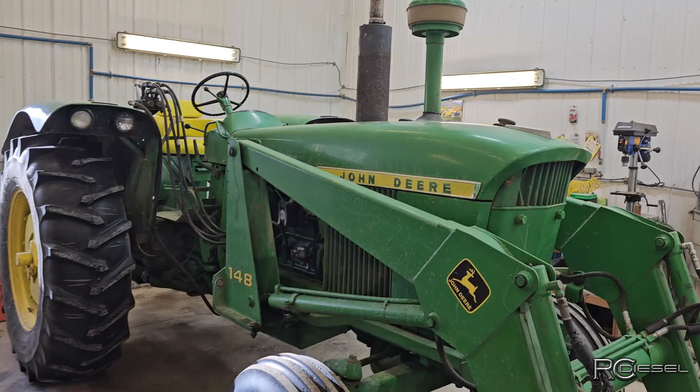Well, there it is. We got the old 4020 down to the shop here. So the story on this one is the customer called and said he had oil leaking down the side of the motor, and I was there one day, just popped in, looked at it real quick, and it's leaking from between the head and the block. That's a real common 4020 thing. So we did some pricing, hummed and hawed. He decided, yep, let's do that head job.

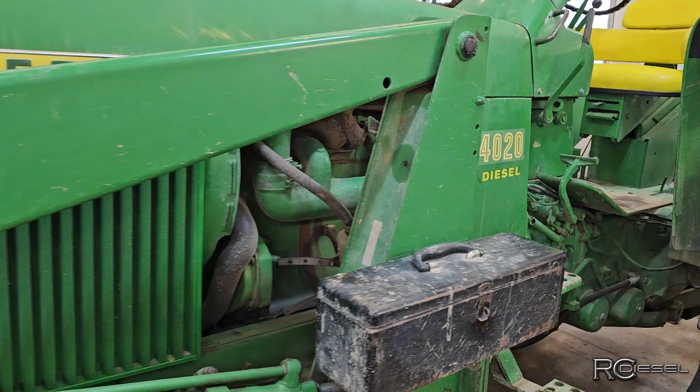And so then when the time came to do that, I was there working on some other stuff, and then I went to pull this tractor in the shop, and I walked up to it and I saw that, and I said, oh, that's bad.

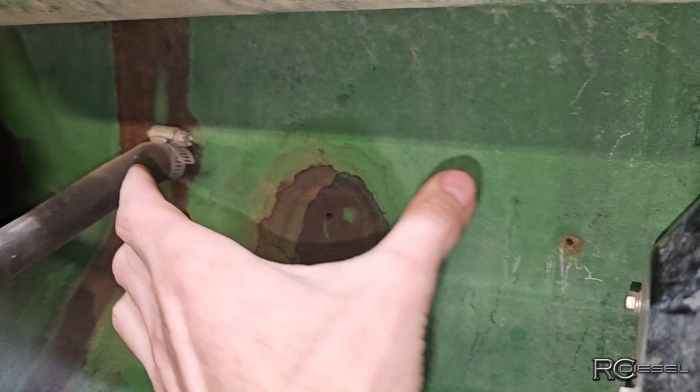So that's a weep hole for your cylinder liners. Your liners sit like this in here, and each one has a weep hole, and there's an O-ring on the top and the bottom. You have coolant up here, and the engine oil obviously goes down to the bottom side. So what that weep hole is for is once your top O-ring gets rotten enough, the coolant starts to fill that cavity in between the two O-rings, and it starts to weep out, which is why it's called a weep hole, and that's your signal that your liners are needing to be resealed.

The nice thing about that is that you get told that before the coolant winds up down in your oil pan. So then we did some more humming and hawing and pricing, and they decided, yeah, if it needs to be rebuilt, we're going to rebuild it. We're going to keep the tractor around for a while.

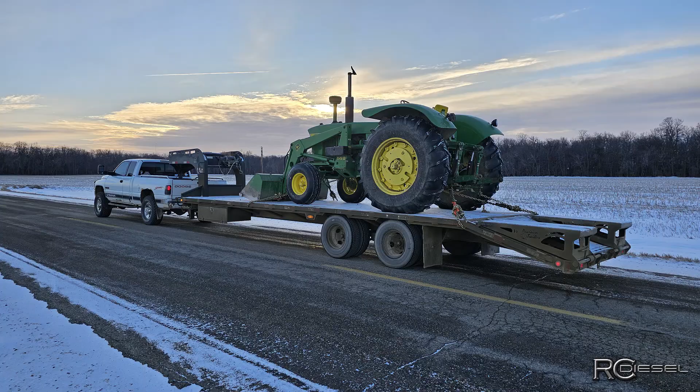Perfect. So then I didn't want to rebuild it at their shop because it's just too many hours. You're always waiting on parts and machining, and so it's too many trips back and forth. It's too expensive. So I just rented a trailer, threw it on the old trusty Rusty, and hauled it down here to my shop for him. And so now we're going to tear this thing down, find out what it really needs, and get her freshened up.

Well, taking that loader off did not go as planned. I didn't have that set up the way I should have. But the loader's off and tractor's in its new spot. We did a little bit of a tractor shuffle here because this one is going to be down for a few weeks. By the time we get a rebuild kit in and head sent away and machining done and all that stuff, we're going to be a couple of weeks for sure.

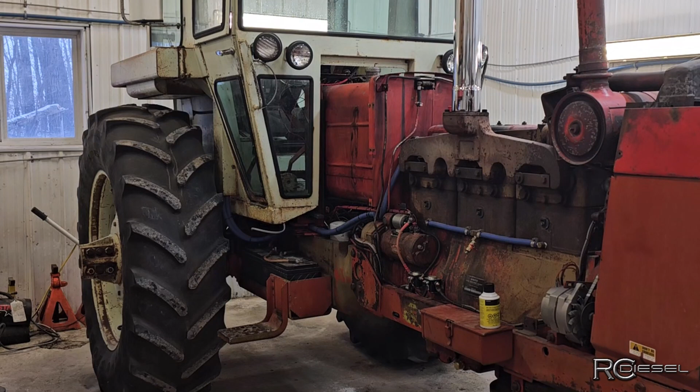So this bay is a lot less accessible to get into the way my shop is set up. That white, I really hope to get that white out of here next week, so it's in a little bit easier bay to maneuver around in. This is my tractor, it's been a huge project. It's been in the shop since, well, it's January now, and it's been in the shop since October, I guess. So just never seem to have time to work on my own stuff.

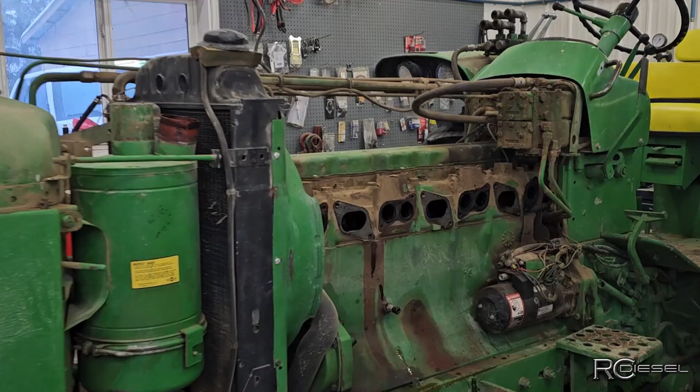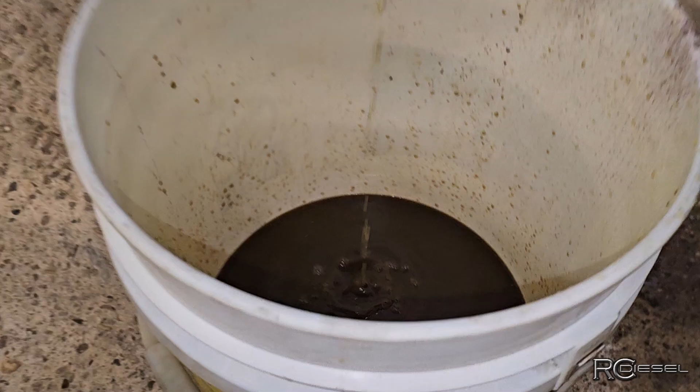Anyway, I gotta get this one apart because we gotta get that head off. So I guess we'll tear into that now. I'm getting a few parts off and on the shelf. The back two bolts on the exhaust manifold were both loose, so that's great. The coolant looks like mud, so that seems fine. Guess we'll keep chugging.

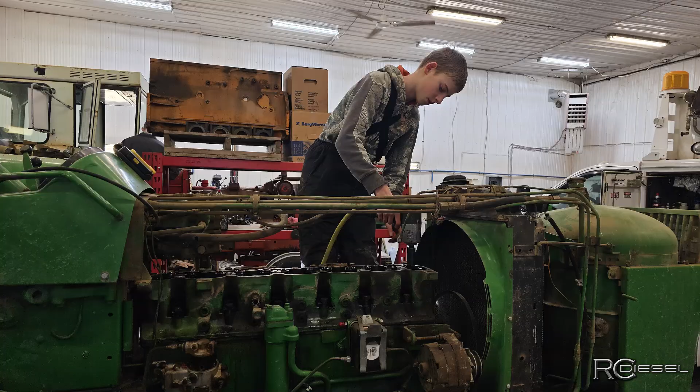Alright, well this weekend I had a couple of my boys at the shop here. One of them was pulling the head and the pan and one piston on that 4020. The other one was wiring up the lights on our old white here.

I wanted to talk about this motor a little bit. The customer who owns this tractor has had it for many, many years. It's been a good tractor, haven't had to do a lot of work to it. Remember, it was leaking oil on the other side there past the head gasket, which is actually a common thing on the 4020s. They do that.

Now this engine, before he bought it, was supposed to have been rebuilt, and he told me the outfit that did it. I've done work for them as well, I know them pretty well. I was pretty surprised to find that these are actually John Deere pistons in here. That's a John Deere part number. That surprised me, because it would be far more typical for them to have put a Reliance kit or an A&I kit in, so I thought that was interesting.

But looking at this head, when we pulled it off, the intake and exhaust ports are all just full of oil, so the guide seals are obviously worn. The intake valves, and the exhaust valves too, look all pretty sunk in. This tractor smoked and blew quite a bit, started okay but had a fair bit of blow-by. Anyway, I know the head has definitely got some time on it, needs to be fixed.

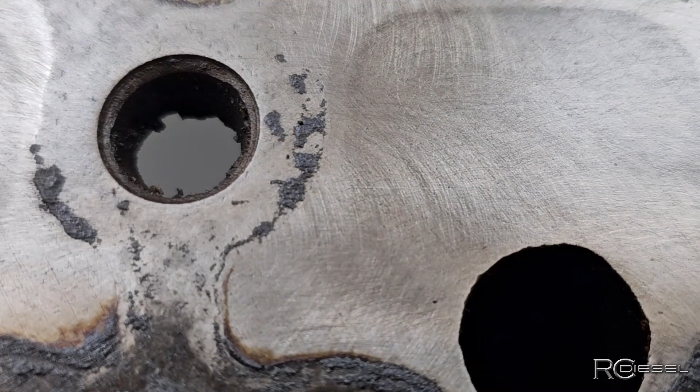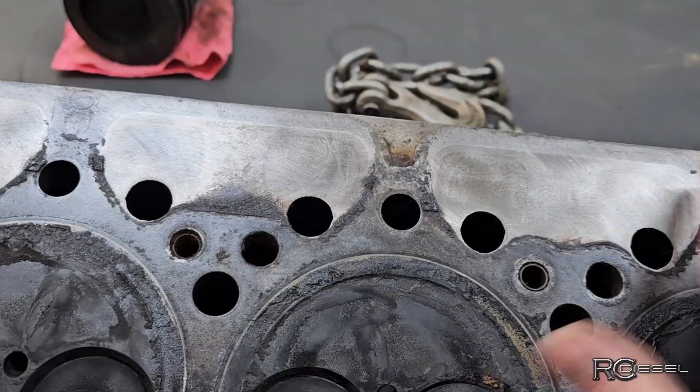But when I look at this, those marks on there would be consistent with a Roloc disc. So I am 99% sure that if this motor was rebuilt, for one, I'm surprised it's got John Deere pistons in it, but this head was not sent in. It wasn't surfaced or anything, otherwise you wouldn't have those marks like that. It would have different machine marks on it. So that's probably why it was leaking oil out of here after it had been rebuilt.

It's many years ago, even though the tractor doesn't have that many hours on it since then, but it's really important to get your head gone through when you take them off. I don't even warranty an engine job if they won't let me send the head in and get it gone through properly. There's just too many things like this that can pop up later, and I know it lasted for many years, but well, let me show you.

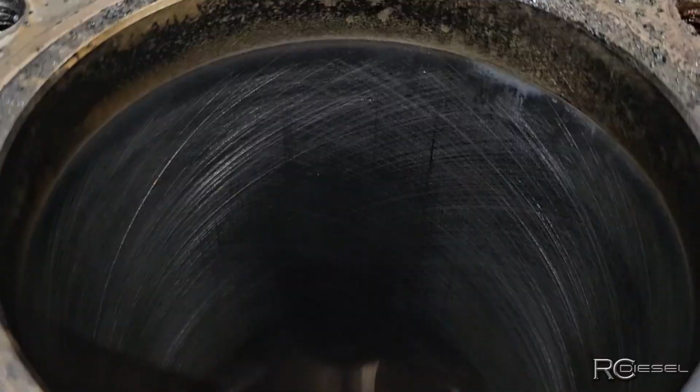Got one piston out, and you can see the crosshatch in there. There's tons of crosshatch. This engine is far from wore out, so we shouldn't be having to pull the head to do a major repair like that already. I would submit to you that if that head had gotten done then, we wouldn't be spending this money now.

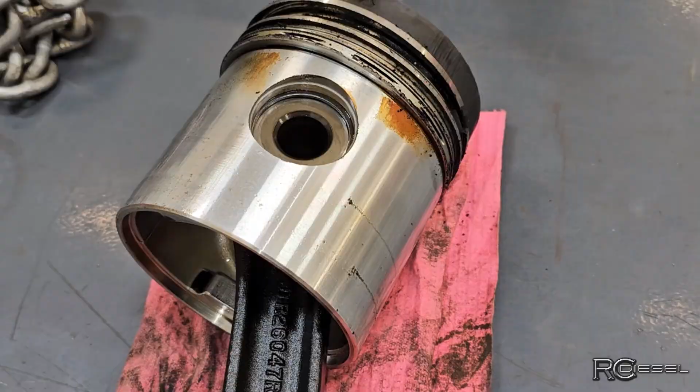I haven't looked real close here yet, but the piston looks great, looks like it's in very nice shape. The rings, I believe, are okay. They don't feel like they're real sharp. They're definitely not wore out.

I think the blow-by was simply a product of the fact that that tractor is more or less a yard tractor and it just kind of putters around, doesn't do a whole lot. Guys, if you have a tractor like this, you got to get that thing hooked up on something where you can work it hard every once in a while and get that engine hot. That's what gets the soot out of your rings. If you don't get that soot out, what winds up happening is they wind up sticking in the ring lands and they don't expand properly and then they don't seal properly.

There's lots of gook in here. These rings are pretty tight, so that's not a good thing, but that's just a product of the tractor not getting used hard enough. And then as far as rebuilding or not rebuilding or whatever, we got this issue that we got to deal with as well. That remains to be seen, we'll see what happens. All I know at this point is what I know, the rest I don't know yet.

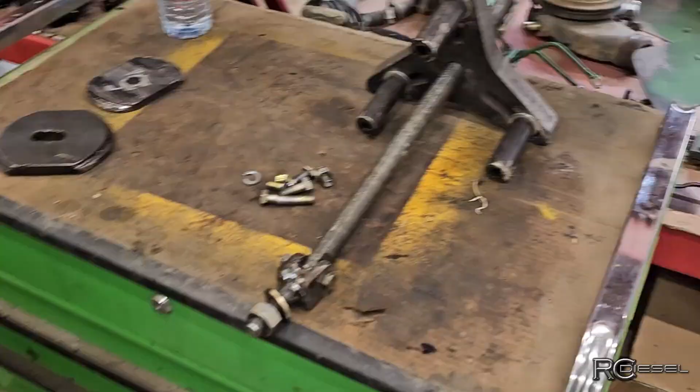Whew, well, we finally got all these sleeves out of here. That was a nightmare, took me all afternoon to get number 2 out. That thing was in there. I was using this puller, I always borrow this from a mechanic friend of mine.

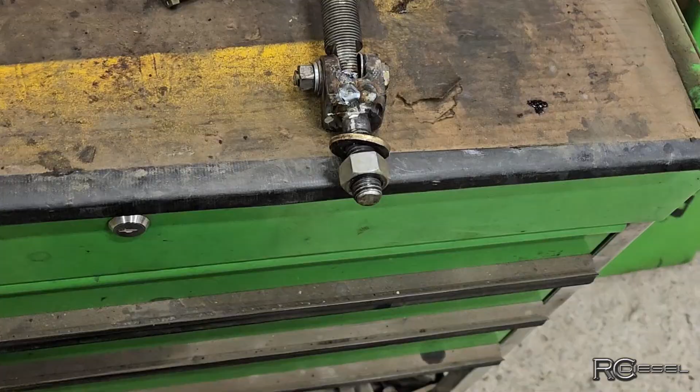We use these plates on there. They fit into the bottom of the sleeve and catch, and then you just pull them out with that. But I kept on breaking the pivot bolts here. And then I remade the end of this because the bolt holes were oblong, so it was bending the bolts and they were breaking. So I remade that all, and the bolt wasn't breaking anymore.

Then I ripped off the ears, so I welded the ears all together more. And then I started bending the plates in half. Man, just craziness. Anywho, we got that all out of there.

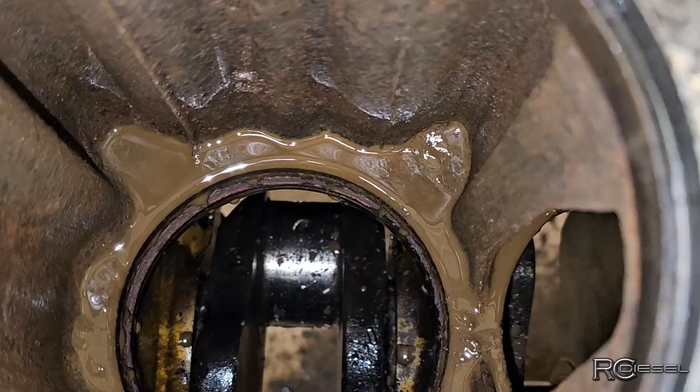Look at the mess inside this thing. Look at the sludge in there. That's the coolant. This thing is a giant mess. I got a pile of work to do.

Oh man, cleaning. Do you see that pipe there? The reason why that pipe is there is because in order to get those sleeves out, I had to jack up on the bottom of the plate. Well, I was using this one. I had to jack up on the bottom of the plate while pulling it with the puller. Otherwise it just kept on breaking stuff.

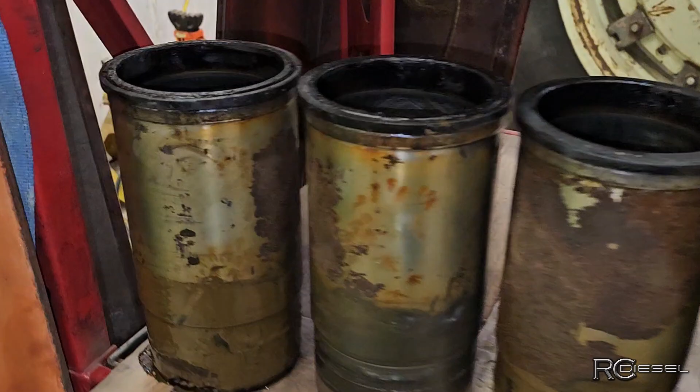Those things were in there so hard. And number 6 sleeve is broken, and that is not a fresh break. It's all black and rusty, so that's been busted for a long time. Actually, on the camera it kind of looks like it is a fresh break, but if I turn the light off there, now you can see it's black.

These cylinders are pretty rusty and pitted. Pretty bad one right there. So I'm going to clean these all up and see what they look like after that. But at this point, I'm not convinced that this tractor got the rebuilt engine that it was supposed to have had.

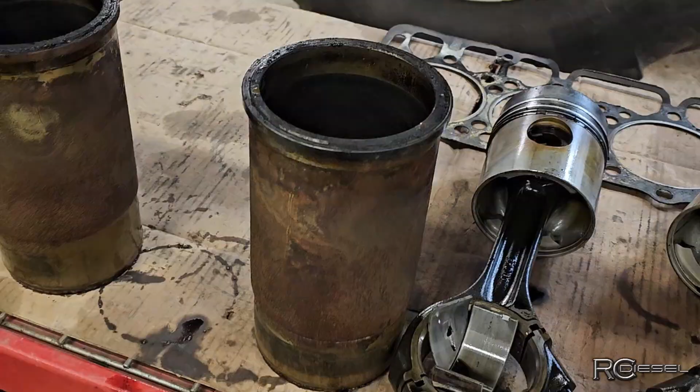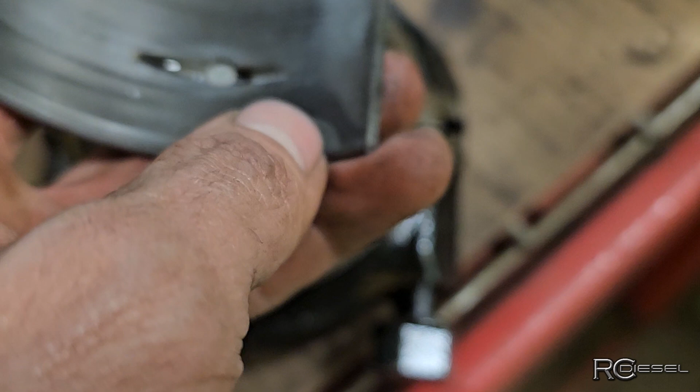The bearings are all pretty, it's hard to tell again on the camera, but they're all pretty scraped up. I had some clean ones here. That one's not too bad, but you can see some wear spots like this all over the place. They're definitely in need of replacement. That one's pretty bad.

So I guess I'm gonna hit this block with some solvent, try and clean it up, make a big mess everywhere. Then I get the top kind of cleaned up and dried off a little bit, and get down into the bottom here and get all that scummy junk out so I can start getting an idea of what I gotta do to clean this up here. It's a lot easier to clean when it's dry anyway.

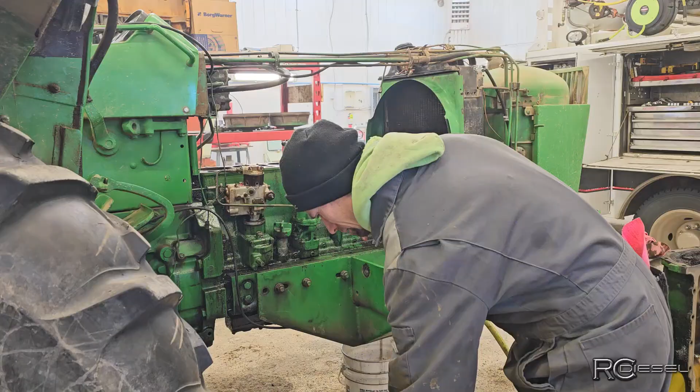Whoa, 4020 parts showed up. Got the Reliance Hyper-Formance kit. That's a good piston. These are good kits, I've put a few of them in. These tractors run really good with a higher compression piston, so looking forward to that.

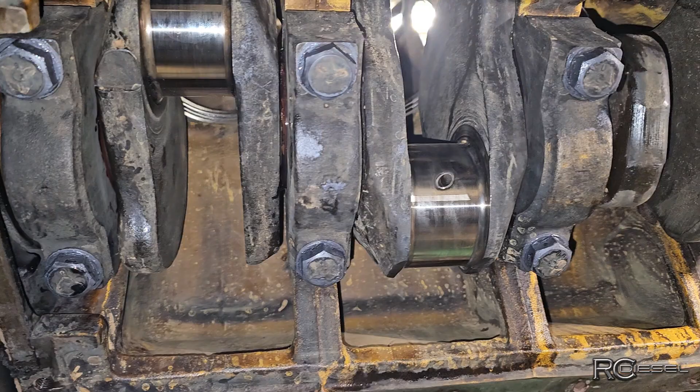There, I just finished the bearing roll in this 4020. I think bearing rolls are probably my favorite engine job. No, definitely not. I'm just trying to think positive.

These are the bearings that I took out of there, and these are not what bearings look like on a low-houred engine. So it's just more indication that this engine was not rebuilt, which is okay. It's fine that it wasn't rebuilt. It just bugs me that it was sold as being a rebuilt engine. That's ridiculous.

Alright, well we got this all cleaned up here. I made an awful mess of this engine, cleaning all that scum out of there, and of course it all drops down on top of the crank, so I had a huge amount of work to do to clean that crank up. I rolled in the new bearings, that's done.

I had cleaned up the deck and tapped all these bolt holes again. It's been a while since I've been on this project, so I gotta get back at it here, but now it's time to pop the liners in, do some test fitting there, make sure that our protrusion is good, and get this engine going. Okay, I'm gonna get into a controversial subject again.

Imagine that. So I got these Reliance liner kits. These are Reliance Fac-Pak cylinder kit, Hyper-Formance Fac-Pak. That just means that the piston is already assembled in the liner. These are the ones I like to put in because they give a little bit higher compression. Starts easier, runs a little nicer, a little less smoke, all that kind of stuff. Probably a little bit more power.

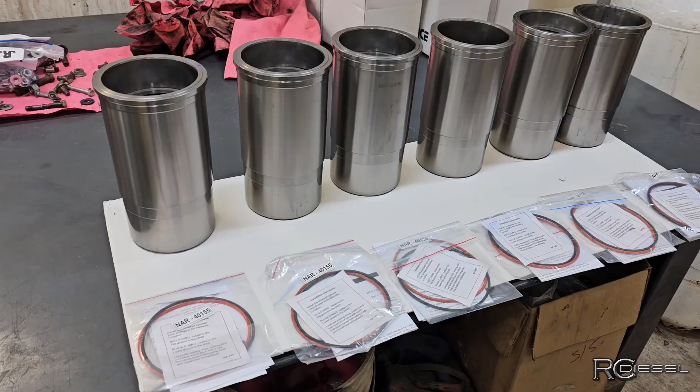There we go, all unpacked. We got our liner packings for the bottom of the cylinder down in here, and we got our pistons in there.

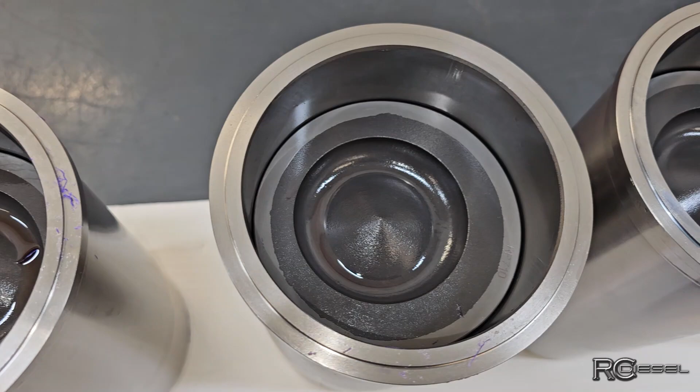Hyper-Formance pistons. You can see the offset bowl there. If you didn't know already, that's your first clue that it matters which way those pistons are going to be installed. And that actually goes with all pistons - they all are to be installed a certain way.

Next step here, I got to test fit these liners, which is a very annoying job when those pistons are in the sleeves like that. So the first thing I got to do now is get the pistons out of there.

What? What'd you say? What? I can't hear you.

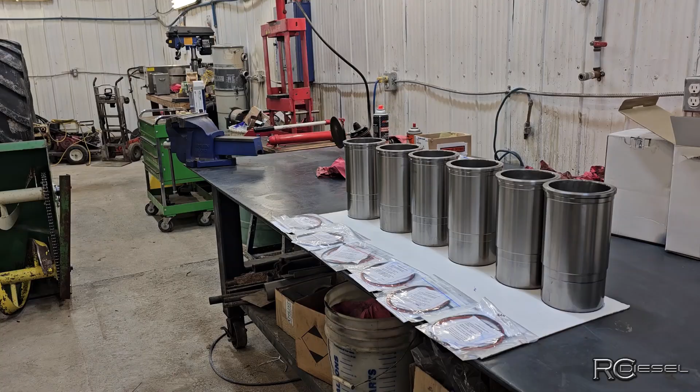Alright, pistons are coming out. You do want to be careful when you do this, and if you can, pull them out the top, because the top of the sleeve is chamfered better than what the bottom is. You don't want sharp corners wrecking those rings. Okay, that one's out.

Ah, sorry, I didn't quite hear you in time telling me not to take these apart. Oh, what's that? Oh, they're pre-assembled at the factory and I'm not supposed to touch them. Okay, I see. Yeah, alright.

All joking aside, this is where we get into some of that controversial stuff. I've been doing this a long time, and one thing I've learned is you can't trust anybody. These factory pre-installed kits - I haven't come across this myself, but I've heard of them being installed with rings upside down from guys that pull these apart and actually check them. And listen, these are installed by people in a factory. Quite often it's probably some high school dropout or somebody that doesn't really care - they're just there for a check. So you want to be careful with stuff like this.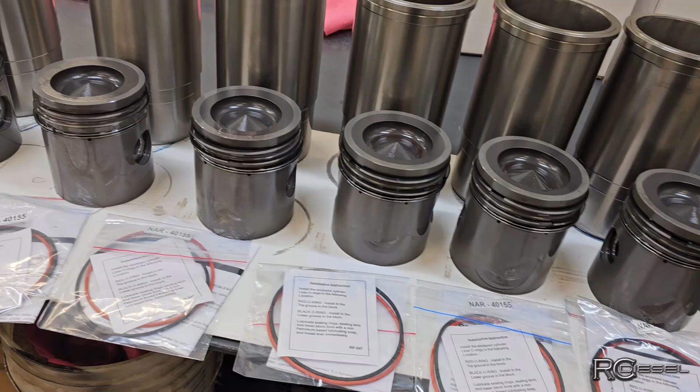If anything happens to this engine, it's my problem because I'm supplying these parts. So I need to make very sure that things are up to my specs, because I'm the guy that's got to warranty this. So I take them apart, I take the rings off, I check the gaps, all that kind of stuff. A lot of people think that the ring gaps are precisely set for the liners.

That's not true. No factory goes through and sets all your ring gaps perfectly. What they do is they throw the ring in, they check to make sure that they're within spec, which is a very large spec, as we've talked about before and as I've shown you before, and that's it. That's all you get. So if you install those things the way they're installed from the factory, it will work. But it could be better. So let's talk about that a little bit.

Right off the bat, one thing I notice is you see here, those scratches? Those are tooling scratches - that one there is from moving in the piston. It's just proof that it's just people that assemble these. Mistakes can be made. There was another one here I saw with some kind of scratches there - no, not a big deal. I'm just saying these are assembled by people, and people make mistakes.

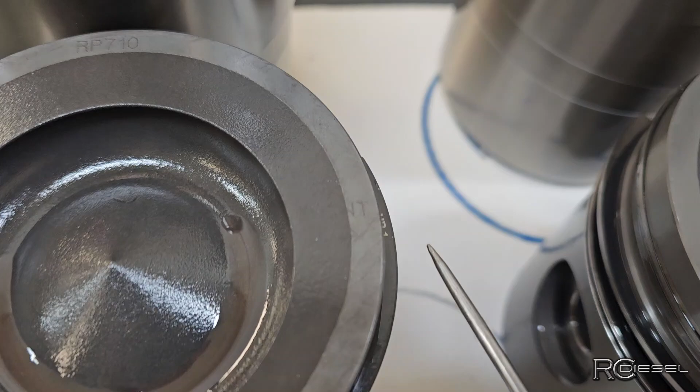So we got our top ring here - that one's installed correctly. Bottom ring, or intermediate ring, right there - the camera doesn't want to focus there, but that is installed correctly. And then we have our oil ring - it can be either way, that one doesn't matter. Same thing here, that one's right. Over here, yeah, that one's right.

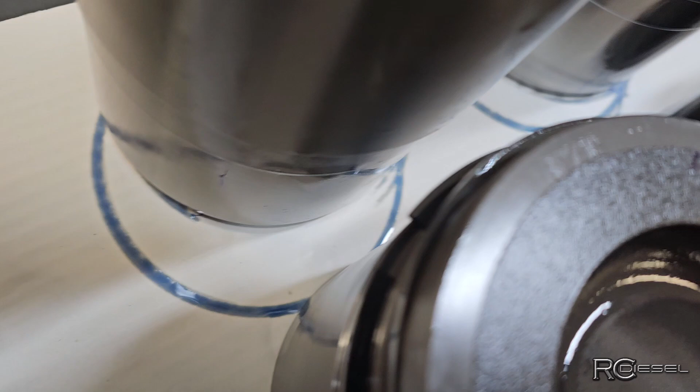Oop, I didn't even get you in the frame there. The ring is where it's marked - it's good, top ring is good. Bottom ring... where's my gap here? Oh, there we go. I keep calling it the bottom ring - it's the intermediate, it's the middle ring.

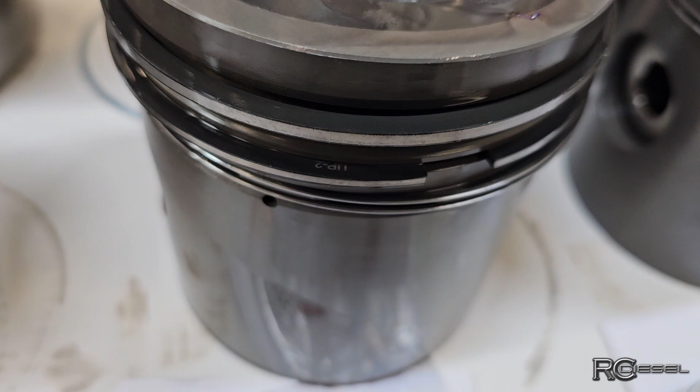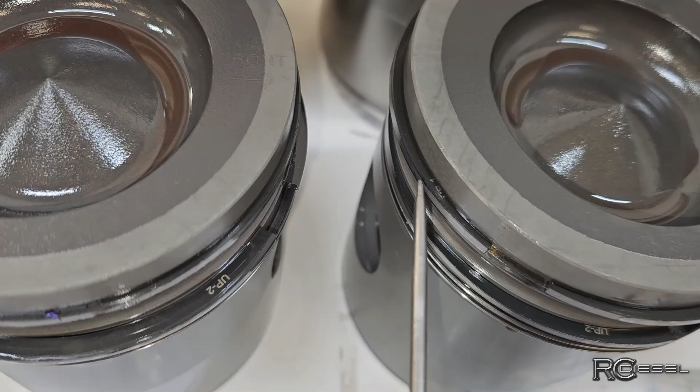That one's installed right, you can see the... oh, let me get some light here for you. There, you can see the markings there. That one's up - these ones are marked, so it's really easy to tell. That one's right, that one's right, that one's right, that one's right. Okay, good.

Now, the next thing I want to talk about is the ring orientation, or clocking as they would call it. So I have all of these pistons with the front facing my right. There, there, and there. You'll notice the ring clocking is different on every piston, and that's fine, that's not a big deal. But I do see a fairly significant issue here. The ring gaps are all about 120 degrees apart.

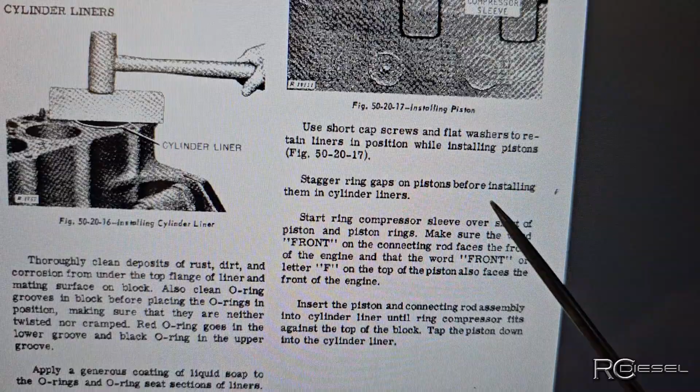That's perfect, that's about what we want to see. Now when it comes to the actual clocking though, most of these piston manufacturers refer you to the service manual. I'll save you the time of reading all of this. This is the factory service manual for the 4020. What I want to point out here is, as far as clocking, it says stagger ring gaps on pistons before installing them in the cylinder liners, and then it goes on to other things. It doesn't tell you exactly where those ring gaps should line up.

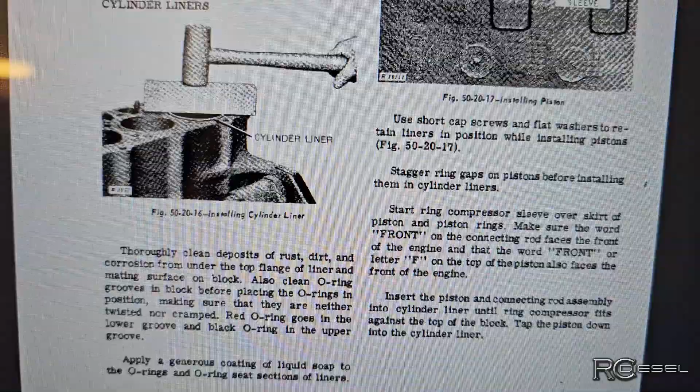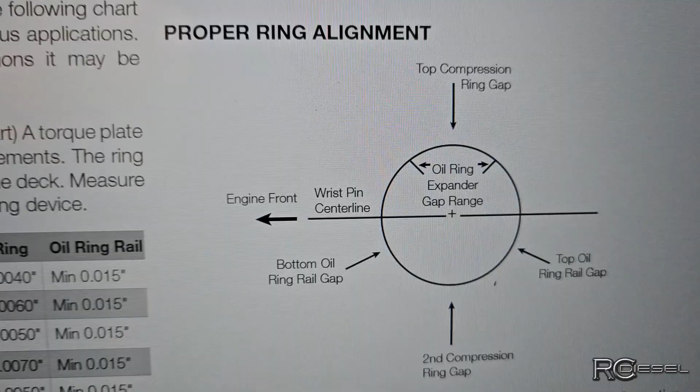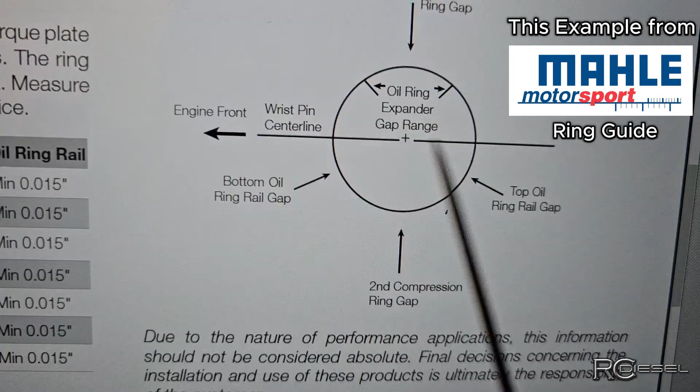Now from my experience, most engine manufacturers will give you a little chart that shows you those rings need to be lined up in a very specific way, like this. This is the chart, or something very similar to this, usually what you see in your factory service manuals. Notice here how they want your ring gaps staggered from the center line where the wrist pin is. They do not want you to have those ring gaps lined up at the wrist pin.

There's a lot of controversy over that, about rings turning on the piston while the engine is running and all that kind of stuff. Some people say these rings are rotating at 60 revolutions per minute while the engine is running at full throttle, which maybe in a performance application, but that's totally bogus in this kind of application. The reason why I say that is without some sort of lubrication or bearing surface in here, these piston rings would eat that groove out so fast, especially the top ring. There's not a lot of lube in here. That ring may move, but it ain't going 60 RPM, I'll tell you that.

Anyway, that's my own opinion, I don't have anything to back that up, but that's what I'm noticing here. Right there, we got a ring gap that lines up with the piston pin. Not on my engines, you can do that on yours, not on my engines. Got another one here, lines up with the piston pin. No, that's a no-no. This one here is a little bit too close, probably would be okay, but it's a little too close.

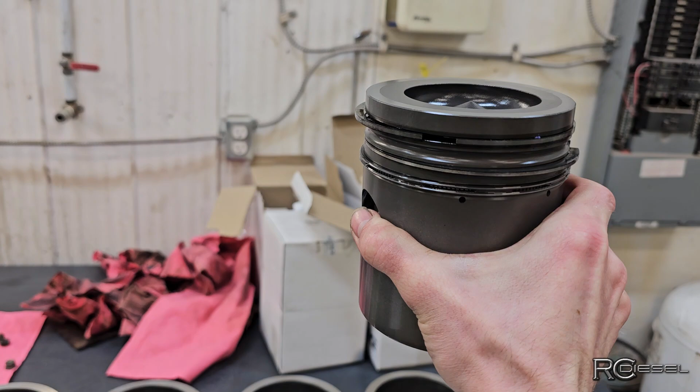So why does that matter? Well, I don't have an exact scientific explanation for that. I don't know everything, but from what I gather, it would have to do with the fact that every time that piston goes up to top dead center and the rod changes direction, the piston rocks and then comes back down. And where does it rock? It rocks right on that pin. So you don't want your ring gap lined up where the piston is rocking.

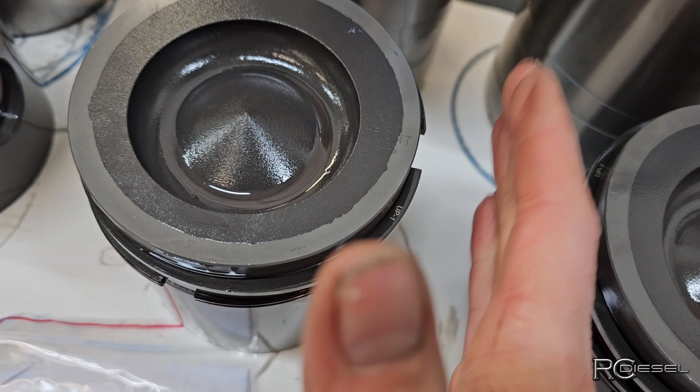Like in a situation like this, where these edges are in line with where it rocks, it just gives a greater chance for those edges of the ring gap to score that cylinder lining and make a mess. When you get to this side, by the time it's rocking, it's not so much rocking as it is moving up and down because of the leverage from your pin to the end of the piston. So it's definitely safer to have it on the other side of your pivot point, I guess you could say.

So this doesn't fly with me, I don't like that, that's not the way I do my engines. I know a lot of people will argue that and say, oh, I've done it this way for 457 years and I've never had a problem, and I've done 18,000 engines and all this kind of stuff, and that's great. Neither have I ever had a problem. I don't do it that way.

Manufacturers 9 out of 10 times tell you not to put that ring gap over top of the piston pin. Lots of forums tell you it's fine. Well, who are you going to believe? Joe Blow spouting his mind off on a forum, or the engineers that design and test and build this stuff? You know, you got to choose.

It's up to you, I'm not a final authority on this. I'm just sharing what my experience and what I know and what I believe.

Okay, so that's why I take them apart. Now let's address why they're pre-assembled that way. There's all kinds of thought processes on that. Some guys say they're pre-assembled because you can't be trusted to install those piston rings without breaking or scratching them or screwing something up. Could be true. Well, let's see what Reliance says about it. I happen to have the paperwork right here.

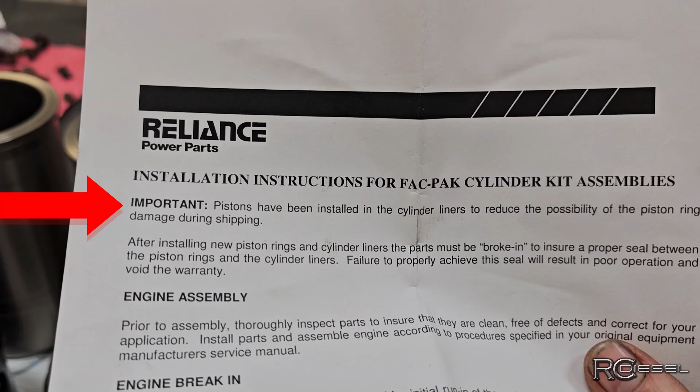Pistons have been installed in the cylinder liners to reduce the possibility of piston ring damage during shipping. So that's what Reliance says about their kits. They installed that piston in there so it wouldn't get damaged during shipping. That tells me we probably should be taking this apart and just double checking that everything is correct. What do you think? Alright, enough of that.

I gotta get this job done. So I'm gonna wipe these all down a little bit now with a dry cloth, a clean cloth, and throw the liners in, test fit them, see where we wind up with that.

Such a satisfying sound. Nice.

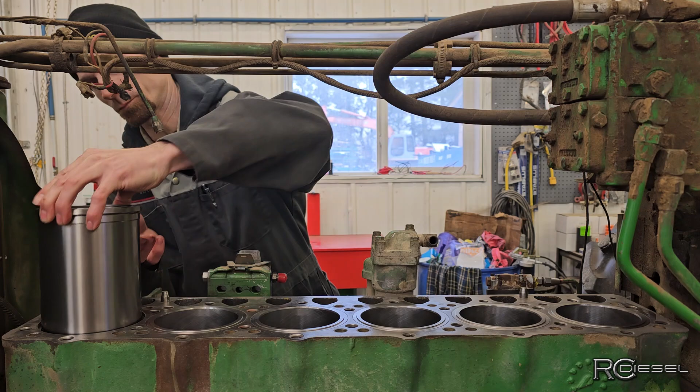Okay, let's see what that protrusion says now. So unfortunately, I only have like 2-inch long bolts to hold these liners down, and 2 inches is way too long. And I don't have enough spacers to shorten them up, so I'll have to swap bolts around all the way down the block. These are 9/16 head bolts, which is not a common size. Nobody carries 9/16 much, so I'll just have to deal with it for today.

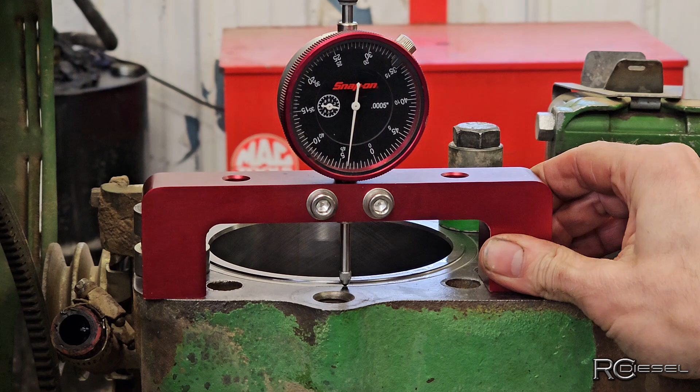Four thou out. You have to hold your liners down with bolts if you want to get an accurate number on protrusion.

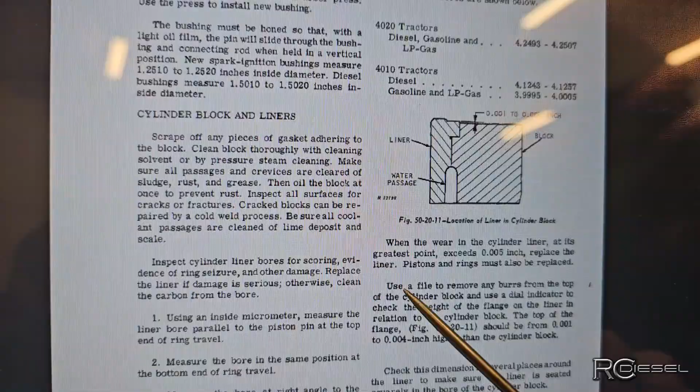Well, that was interesting. Book says liner height is 1 to 4 thou. It says down here: when the wear in the cylinder liner at its greatest point exceeds 5 thou, replace the liner. Use a file to remove any burrs from the top of the cylinder block, and use a dial indicator to check the height of the flange on the liner in relation to the cylinder block. The top of the flange should be from 1 to 4 thou higher than the cylinder block.

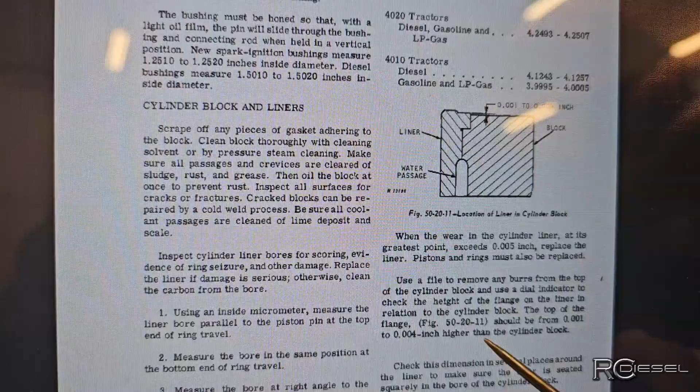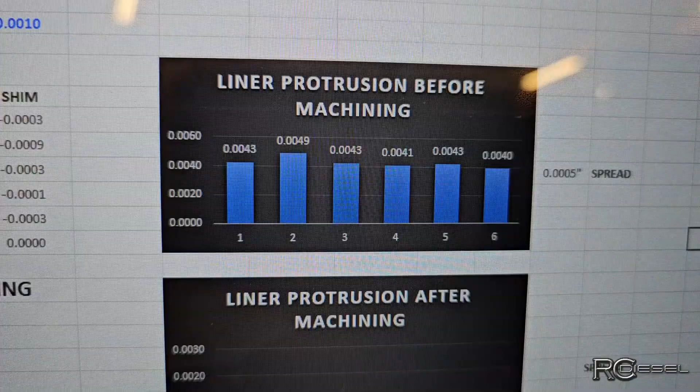So what that tells me is that block is probably not straight, not flat. Now it's true, I had not thrown my straight edge on here yet. If that block is flat, you take your flashlight and throw it in behind there, you should not see much at all for light all the way across there. So it should look like this. See, my light is on, but you can't see any light coming through there. Now if I work my way along, all of a sudden you can see a bit of light. That was a bolt hole right here, so that doesn't count.

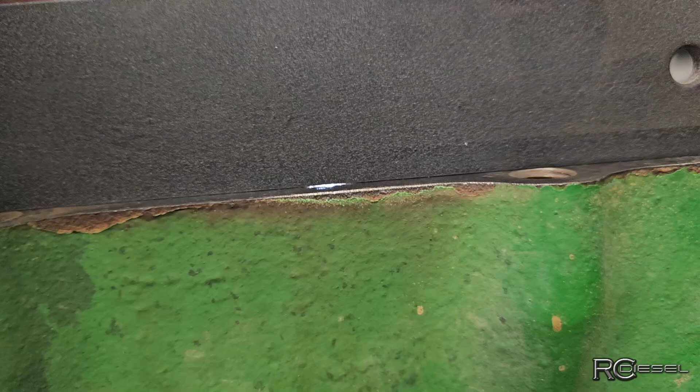Or coolant passage, sorry. There you can see some, quite a bit showing there. The camera doesn't really do justice here in this case, but there's actually quite a bit of light shining through in places. Every time you see that big spotlight, that's where it's going into one of those holes there, so that doesn't count. But we are seeing a lot of light through there, so that block is not very flat. It's not bad enough that you can't get a feeler gauge in there, so it's not horrible. And I mean, even when we're looking at the chart, we're dealing with thousandths of an inch, like less than a sheet of paper, so it's not much, right?

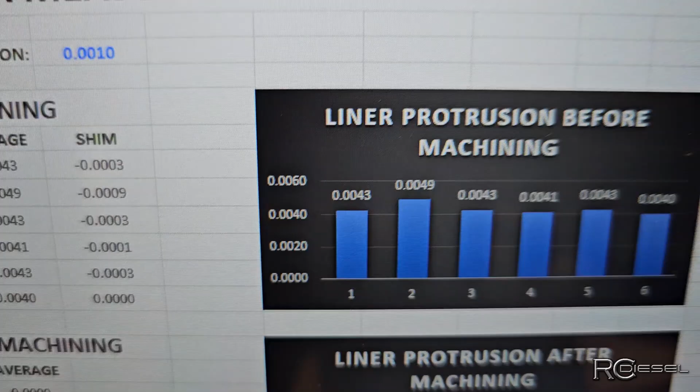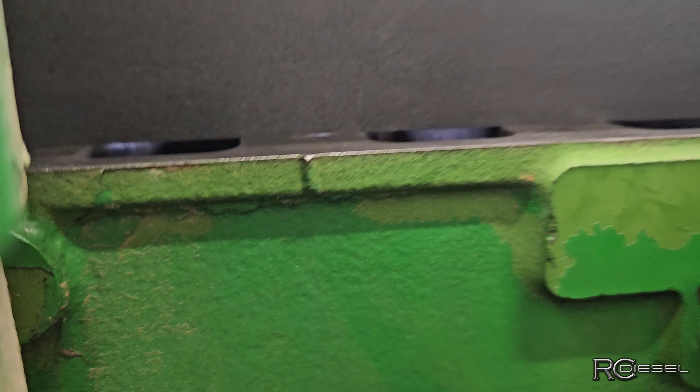What is going on over there? So if we look here, there's a ton of light coming through underneath on that bridge. Same there. This one's got tons of light too. This one's really down. So yeah, this block is not straight.

Alright, there you have it. So to do this right, we actually need to pull this block out, finish tearing it down, rip the crank out of there and send it off to get planed, get the top surfaced, and get the counterbores recut. But I talked to the customer about it, and that is a lot of work, adds a lot of expense to this job.

For the purpose of this tractor, doesn't really make sense. There were no issues with this engine at all, outside of the fact that on this side it was leaking oil all down here from the head gasket, which is a common 4020 thing. That probably was happening because that block is not even.

Regardless, we're not going to go through and tear the whole thing apart. We are going to put it back together the way it is. I'm going to put some copper coat or some kind of sealant on that head gasket to help it seal. Otherwise it was running fine, working fine, starting fine, so we're just going to run it the way it is. This tractor is not going to go to the field and cultivate for days on end like it used to, so we're just going to make it work.

For checking flatness on these, if you don't have a calibrated straight edge, those things are pretty expensive. If you have a long file you can throw on there, take that file and give it a couple of scrapes all the way across, and that'll show you pretty quick if you have high spots or low spots. If it's a used engine that hasn't been surfaced, yeah, it's going to have them, but it'll show you how bad they are.

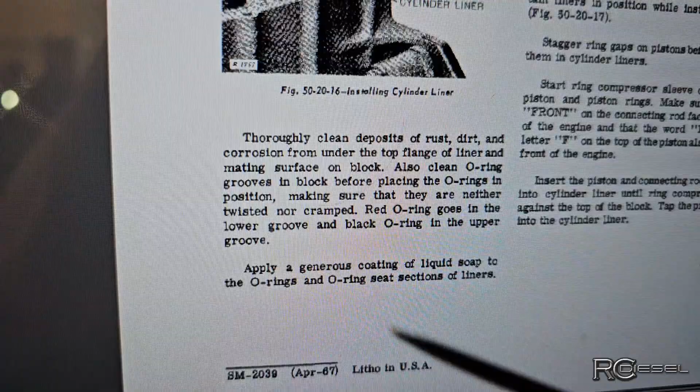For the last 6 minutes when you weren't looking, I was installing liner O-rings. Book says also clean O-ring grooves in the block before placing the O-rings in position, making sure that they are neither twisted nor cramped. Red O-ring goes in the lower groove and black O-ring in the upper groove.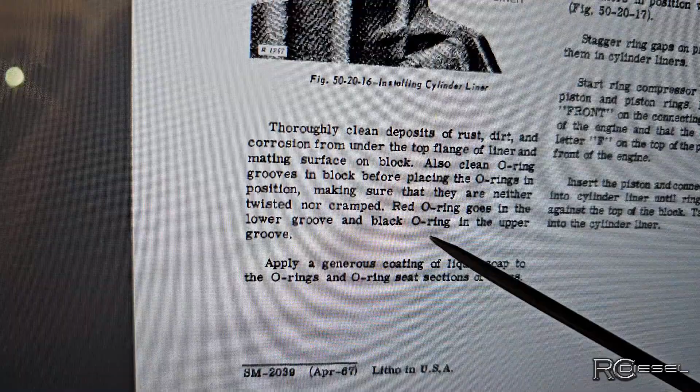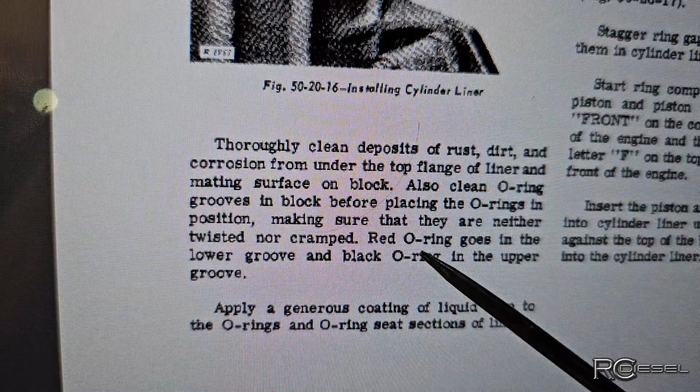Now this is the factory John Deere manual. Then if we come over here to my Hyper-Formance cylinder kits, in these bags with my liner O-rings, it says install the enclosed cylinder liner O-rings in the following location: red O-ring installed in the top groove of the block, black O-ring installed in the lower groove of the block. No — the red O-ring goes in the lower groove and the black O-ring in the upper groove.

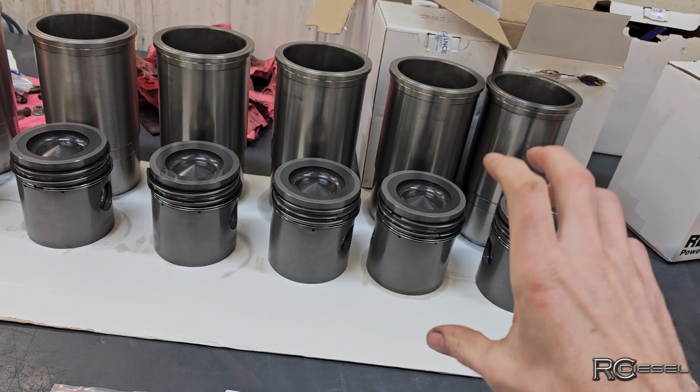Alright, so who are you going to listen to? When there's a contradiction like that between the factory service manual and your parts kit, you always go with the instructions in the parts kit, because those instructions match the specific parts that you're getting. These are not John Deere parts, therefore they are going to be a little different than the actual John Deere stuff. So we'll go ahead and do it the way the instructions say.

So I went ahead and did it the way the instructions say. The red O-ring is on top, the black one's on the bottom. It's really important that a guy makes sure those are not twisted. They've got to be sitting in there nice and relaxed. Otherwise what happens is when you slide that liner down in there, once the bottom chamfer grabs those O-rings, it'll just squish them right out of there. Ask me how I know.

No, don't. Please don't.

Okay, just had to run out for a quick service call there. I had a customer with a Kenworth semi-truck that had a PACCAR in it. They took the PACCAR out and put an X15 ISX Cummins in there. So with the new harness and everything, they were having some issues with the accelerator pedal. They weren't getting any signal back to the ECM, so I just had to throw the scanner on there and see what was going on. I think we got that taken care of now.

So, now back to my liner O-rings. Oh no, I did that already. Oh no, that means we're doing liners now. Okay, back to liners. That's the problem with being a breakdown guy - seems like every call is pretty much an emergency. You gotta take off and rip over somewhere else, and then stuff like this that's not an emergency just takes forever to get done.

So what are we doing here? I'm going to clean these liners up, get them soaped up and dropped in place. Alright, I got my liners all cleaned up, ready to go in.

It seals the coolant on that flange right there. If we go over here, that flange sits right there in the counterbores, and these counterbores are a little bit beat up. You can see how it's really not that smooth there - that's not going to give a very good seal. The fire ring on top in the gasket also seals that if it does sneak past there, so you're not really required to put any sealant around those flanges when you put these together. But because these counterbores, I already know they're worn at an angle from doing my cylinder protrusion, I think I'm going to go ahead and put a little bit of flange sealant on here just to help it have a 100% chance of sealing properly.

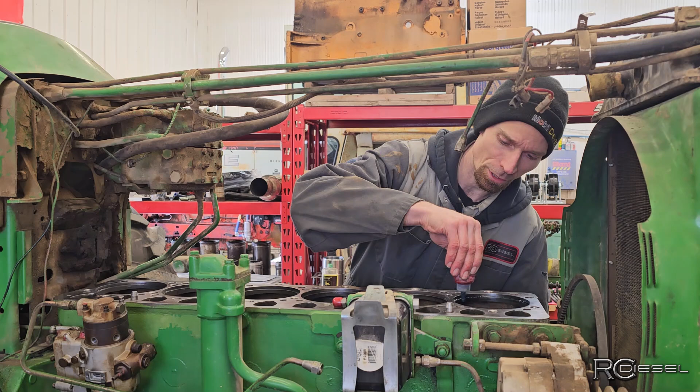When you're using flange sealant on these, you want to be very sparing with it. You want it to last - you want your bottle to last a long time. Really the idea here is you just want to fill in the low spots. You don't really want to add anything for that flange to sit on top of while it's in here and hold it up - that's not the idea at all. You just want to fill in the low spots so that you have a little bit better chance of it properly sealing.

This is anaerobic sealant that I'm using here, so it's not going to dry until the liner is in and gets the air away from it.

Well, different people do things different ways. I like the liner soap - that's what I use for doing this. Right now I'm just going to soap up my O-rings.

Then I want to rub some of that on my liner as well on the bottom here, so that when it goes in it's going to be nice and slippy. Just like that, and we just want to kind of work it in. Boom, that's it right there. And we're going to go ahead and throw a bolt in to help hold it down.

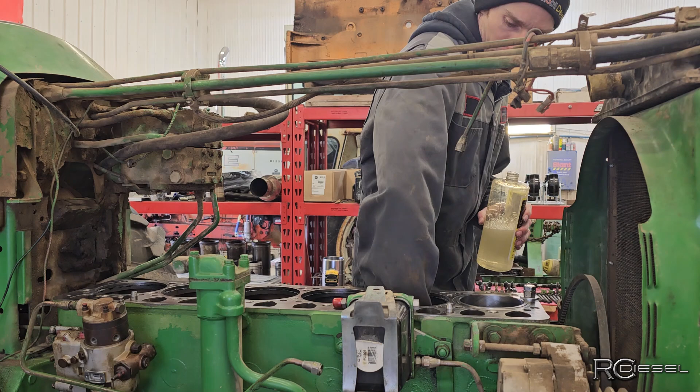Okay, remember next - lube these up really good. There, that one's dropped in. Just kind of give them a gentle wiggle and then press them down in there. These engines do not have press fit liners, even though they can come out awfully hard - they're not actually pressed in there. Forgot to put my bolts in. Oops, that's the wrong spot. Goofball.

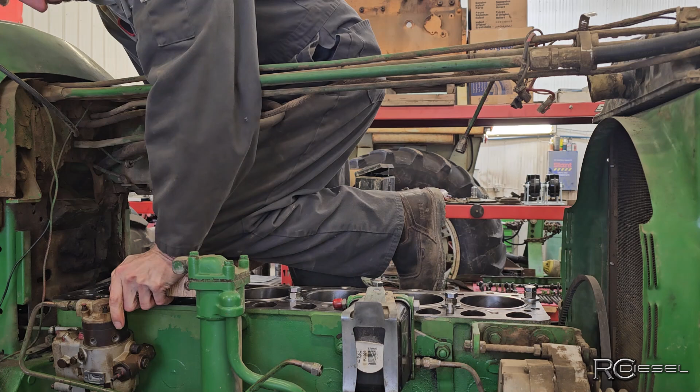It's a little bit tough to get in here the way this SCV stack is. I think I'm going to need a piece of wood on that one. I just can't quite get my weight on this the way I need to, so I'm going to have to use a block of wood here to help get on that liner. Come on, little buddy. It's going down, but man, is it stubborn. There we go. I can't get on top of it properly because this stuff is all in the way here.

Okay, save the hardest one for last. Well, this O-ring is not in, or else I just pulled it out - what happened here? Can't get my arm in there because that SCV's in the way again. This is where doing these on the engine stand is just so much nicer - you got all the room in the world to work then. Huh, I cannot get that on there.

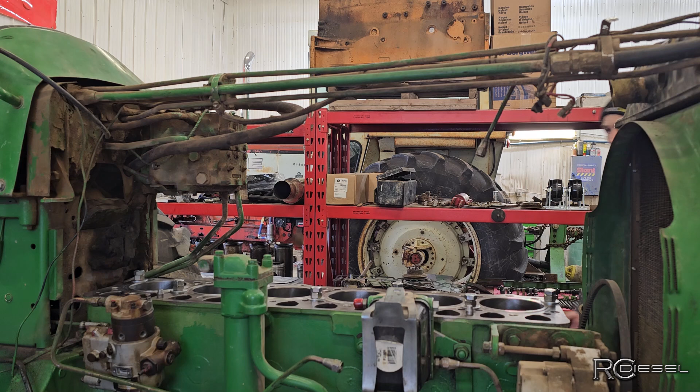Okay, let's try again. These top O-rings are super flimsy, so... Perfect. Alright, those are all tight. Crawled underneath there and checked to make sure I didn't have any O-ring protruding anywhere. I make sure I didn't shear them off. Looks all good, so now I'm going to throw my top rings in and we'll see what the gap is like.